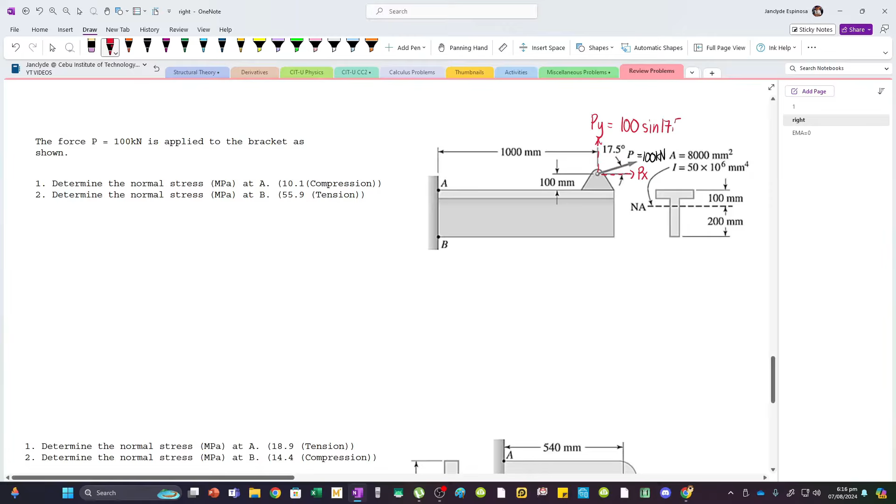And then diba, this force is inclined, so we can resolve this into components. Sabihin natin Py, and this is Px. Yan. So Py is 100 sin 17.5, while Px naman is 100 cos 17.5. Yan. So, if we'll apply this force, yung Py natin, it will cause this bending.

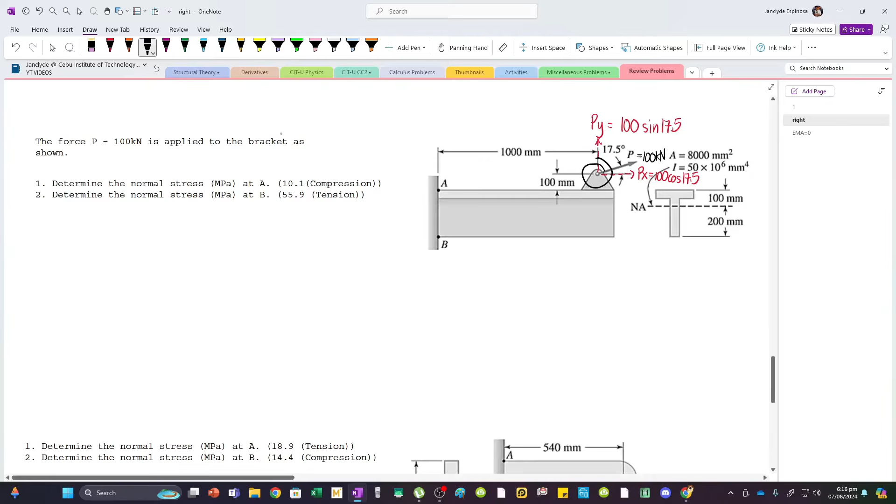Parang, if we'll pull this element, magiging ganyan. Pag ganyan yung bending, so therefore, the bottom side is subjected to tension pala kasi humaba yung arc length. Mas mahaba yan kasa dito. So ito yung compression.

So for the first question pala, determine the normal stress at A. This will cause a compression, so magiging minus. So sigma A equals, let's first look at the axial force na lang, axial stress.

So the only axial stress is, diba, perpendicular sa section natin. It is caused by this load, which is acting to the right. So we can transmit that dito, parang transmit natin yan siya. So this is 100 cos 17.5. Yan. And then, yung area niya is this one.

But yung area ng T-section, given na siya. We have 8,000. So, for the first stress pala, meron tayong P over A. And then, since this force is acting away from the body, this is essentially a tensile stress.

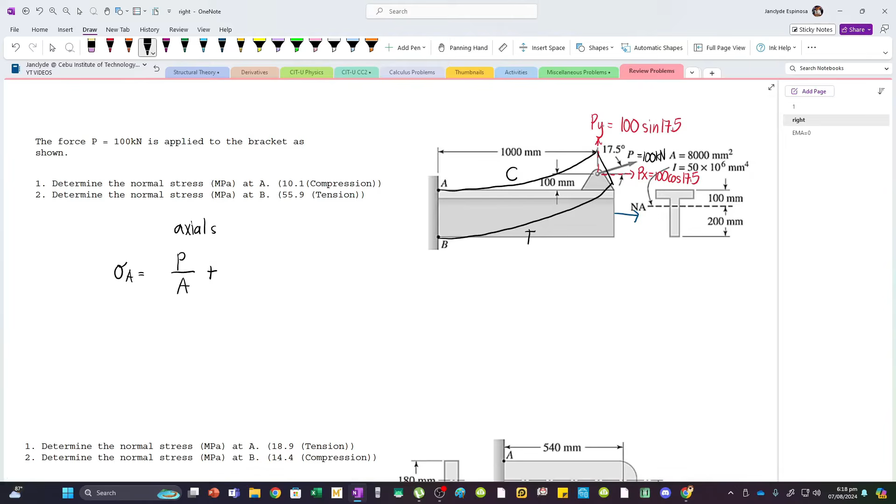So, plus lang yan. And then, next, let's look at Py. So, for Py, parang this is axial stress. And then, we have to add bending stresses. Now, dalawang components kasi, iba-iba yung bending.

So, for Py, lagay ko na lang dito. Move natin na. Yan. For Py, we have compression yung makokause niya sa top fiber. So, magiging minus. So, parang minus MC over I for Py.

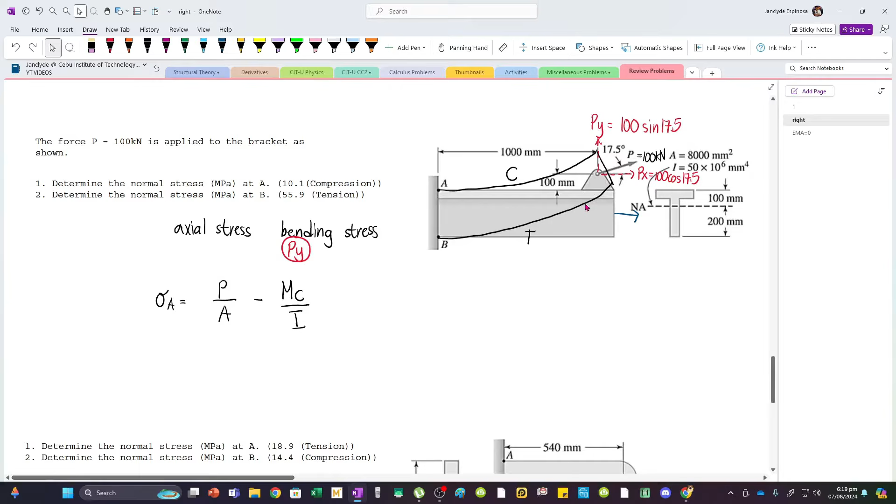Now, for Px naman, iba yung bending na makokause niya. So, erase natin. Yung Px, about the neutral axis, it will cause a clockwise rotation. So, yung bending natin, due to Px is parang pa ganyan. So, ito na yung humaba. Yan. At ito yung nag-shorten. So, ito pala yung compression while this is tension due to Px.

So, the top fiber or the point at A is subjected to tension. Yan. Tension kasi yan. So, pala, plus MC over I pala tayo para sa Px.

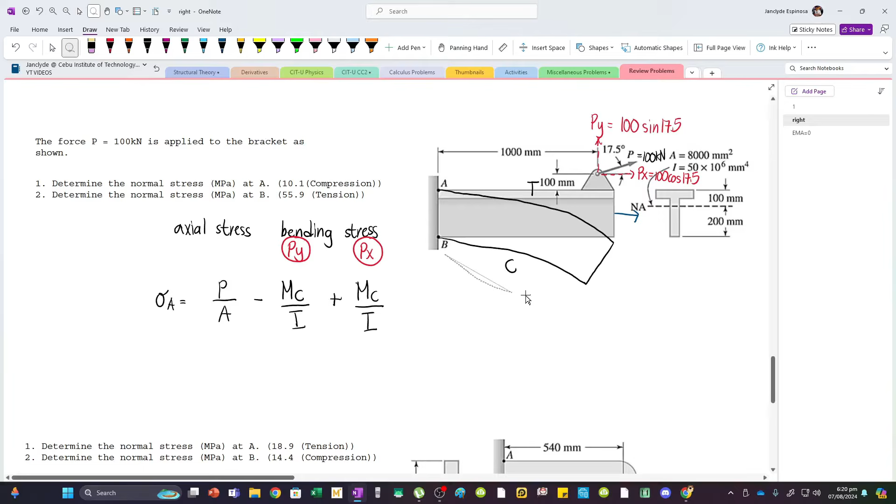So, erase na lang din natin. I hope na nagets lang. So, ano yung force natin? The tensile force is due to Px. So, we can replace P by 100 cosine of 17.5, and then we have to divide this by the area. Now, the area is 8,000 mm squared.

Yan, given na yan. So, divided by 8,000. Now, diba, we want the stress in MPa. So, we have to convert kN into newtons. So, multiply natin to by 1,000. Yan. And then, for the load Py, its moment about A is 100 sine 17.5 multiplied by 1,000 mm.

Now, it will cause compression sa taas. So, we have minus 100 sine 17.5, and then convert natin yung kN into newtons. So, multiply natin by 1,000. And then, ito pa yung force natin, force in newtons. So, multiply natin yan siya by the moment arm. So, times 1,000. So, color na lang natin.

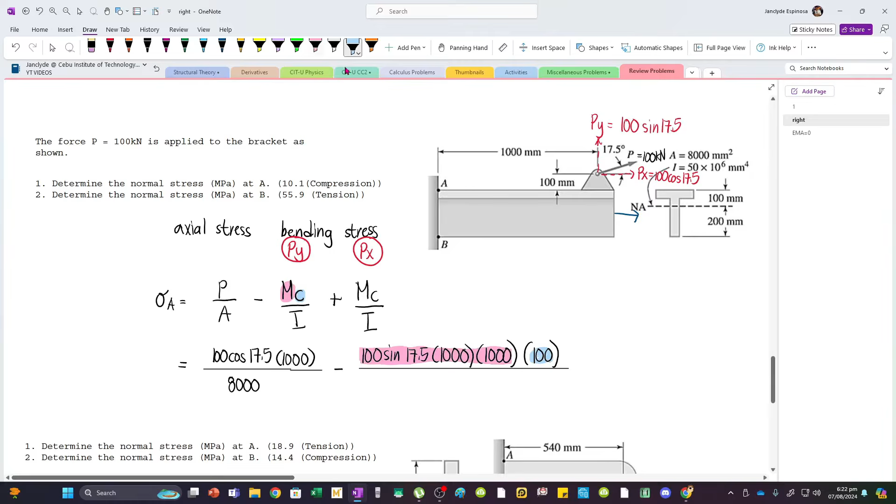And then, divide natin by, color na lang din natin. Ito yung C. Yan. So, divided by I. So, I is also given 50 times 10 to the 6.

Yan. And then, for the last moment, magiging tension yung taas. So, plus. And then, our moment is Px multiplied by the moment going to the neutral axis of the section. So, we have here, the force is 100 cosine 17.5. Multiply natin by 1,000 to convert it into newtons.

And then, our moment arm is, diba, this is 100, yung distance niyan. Now, we want to go to the neutral axis. Ito yung neutral axis. Yan. So, the moment arm pala of Px going to the neutral axis is parang 100 mm plus another 100 mm. Yan. Kasi 100, parang 100, 100. So, 100 plus 100, 200 pala yung moment arm ng Px.

Yan. So, this still accounts for, ito pa yung moment. And then, yung C natin is still the same, still 100, kasi yung A nasa top side. And then, divide natin by I. So, I is 50 times 10 to the 6. Yan. So, try down natin.

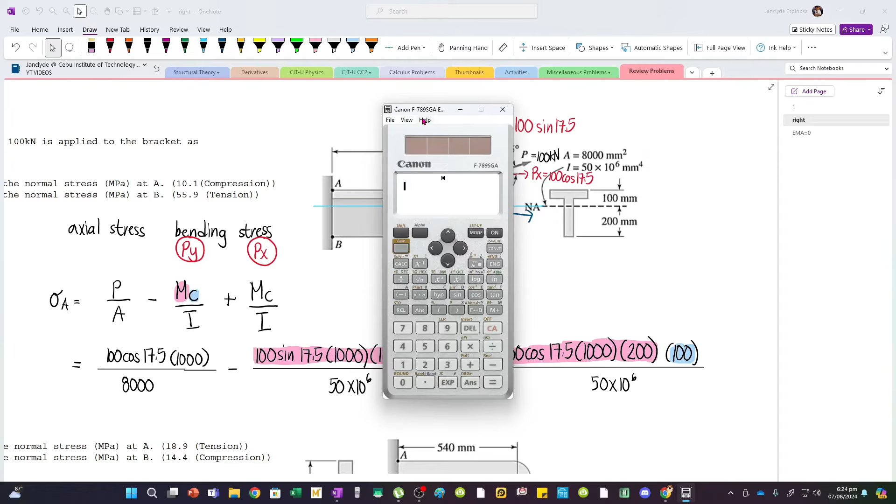Medyo hindi yan magkakasya sa calculator natin. So what we will do is store na lang natin yung value na to and then add natin. So 100 cos 17.5 times 1,000 over 8,000, wait lang, minus 100 sine 17.5 times 1,000, dalawang 1,000, so 1,000 squared na lang. Yan, and then times 100, divided by 50 times 10 to the 6, or 50 E6. Yan, so store na lang natin to.

Lagay natin sa A, and then recall A, and then we have this value. Ano na lang, para mas madali, tip ko na lang, just store the following values into, sabihin natin A, ito sa B, ito naman sa C. Now, store the positive values ng expressions na to. So again, 100 cos 17.5 times

1,000 over 8,000, lagay natin sa A. Yan, and then this expression naman, 100 sin 17.5 times, ano yan, 1,000 squared times 100 divided by 50 E6, lalagay natin sa B. And then this expression, lagay natin sa another variable. So 100 cos 17.5 times 1,000 times 200 times 100 divided by 50 E6. Yan, so shift store, lagay natin sa C.

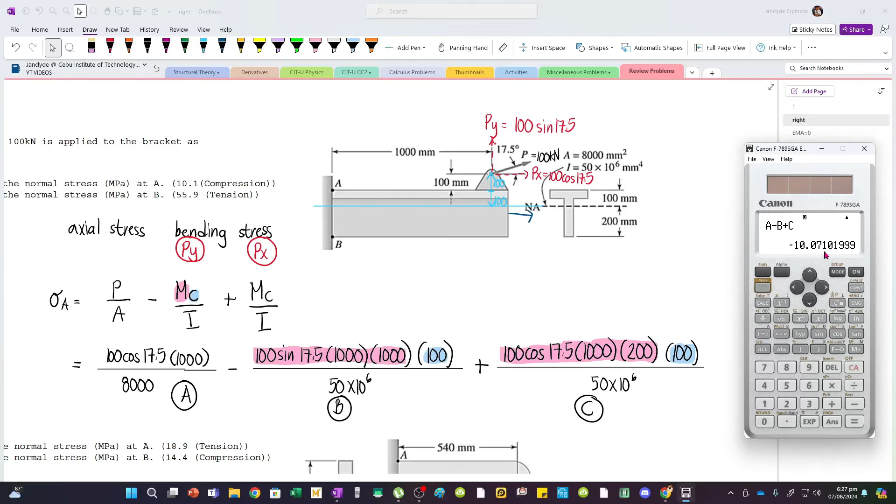So recall A, positive yan. So positive lang din, and then minus B plus C. Yan, so we have negative 10.071, and then this is negative, so compression. So lagay natin minus 10.071, and then naka MPa na yan, MPa compression.

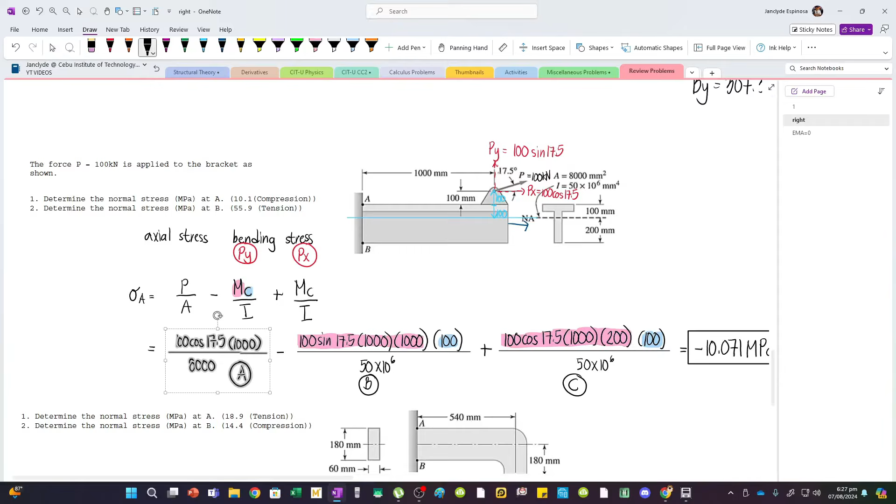Yan, so ito yung stress at ano yan, stress at A. Now sa B naman, yung mag-iiba lang is, di ba, the axial stress is always tensile kasi this is acting away from the body. But yung bending stress is magbabago kasi, di ba, yung bending na mako-cause ng Py, again, if we'll pull this figure, parang ganito yung bending. Sulat na lang natin ulit. Yan, so ito yung compression, ito naman yung tension. So therefore, point B pala is subjected to tension due to the force Py.

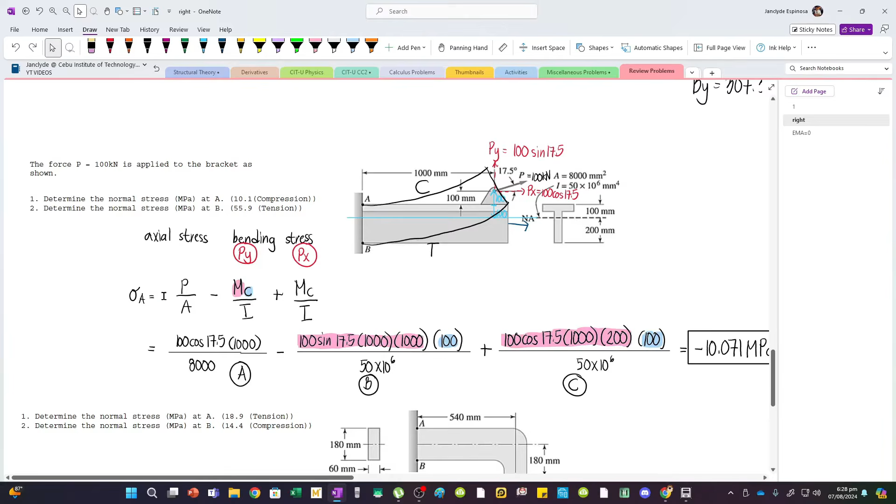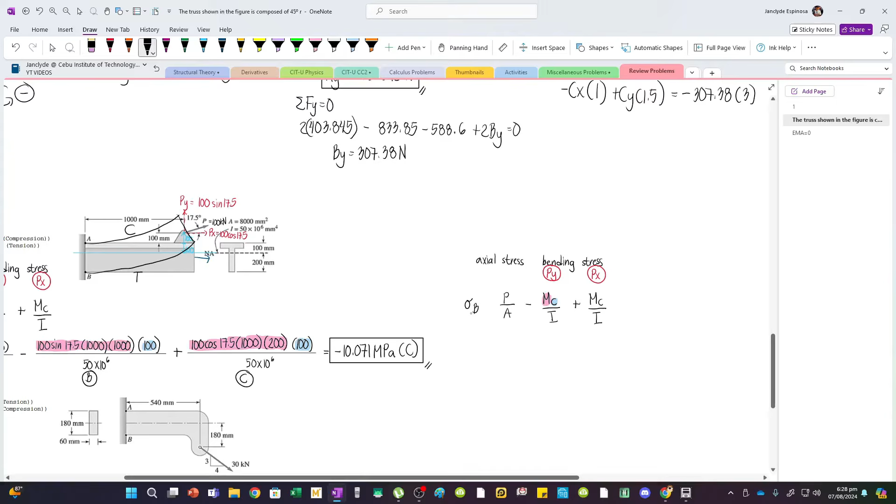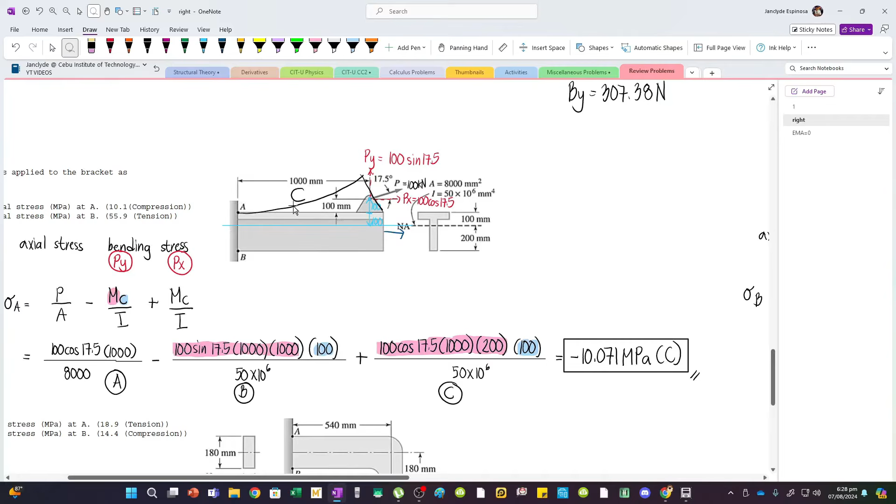So yung mangyayari pala is, copy na lang natin to. So for the normal stress at B, Py causes tension at B. Yan, and then opposite yan siya sa kabila. Wait lang. For Px naman, opposite yung bending. Pinakita ko naman kanina. Parang ganyan yung bending, so ito yung compression. Ito naman yung tension. So for Px pala, this must be minus.

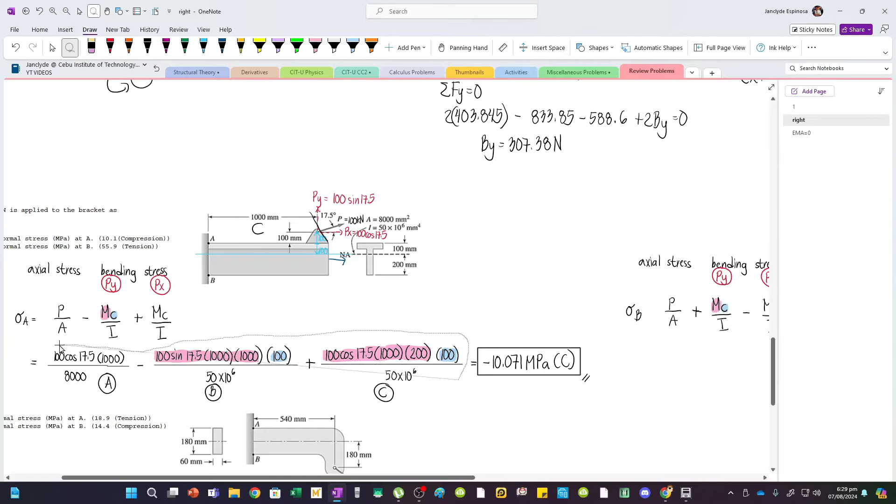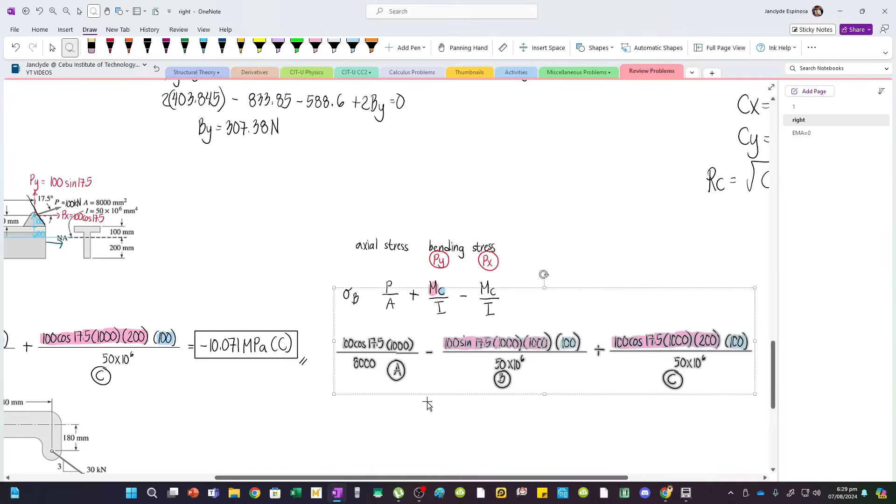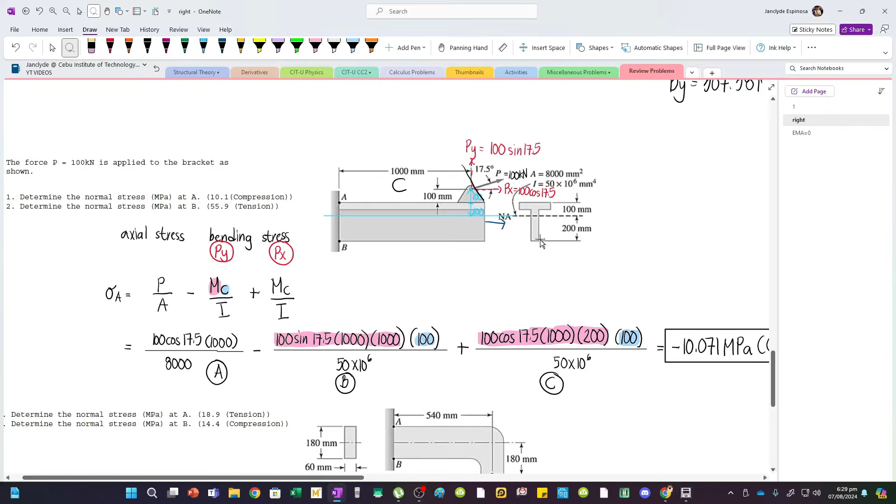Yan, so we can just copy this expression and then meron lang tayong babaguhin sa value of C. So ganito yan. Lagay natin dito. Yan, now C for the bottom side is 200 mm. Yan yung farthest distance from the neutral axis to the bottom fiber. So gagawin natin is, papalitan lang natin yung 100 by 200 na. So 2 yan, this is also 2 din. Yan, so 2, and then again, this will now be minus, while this is plus.

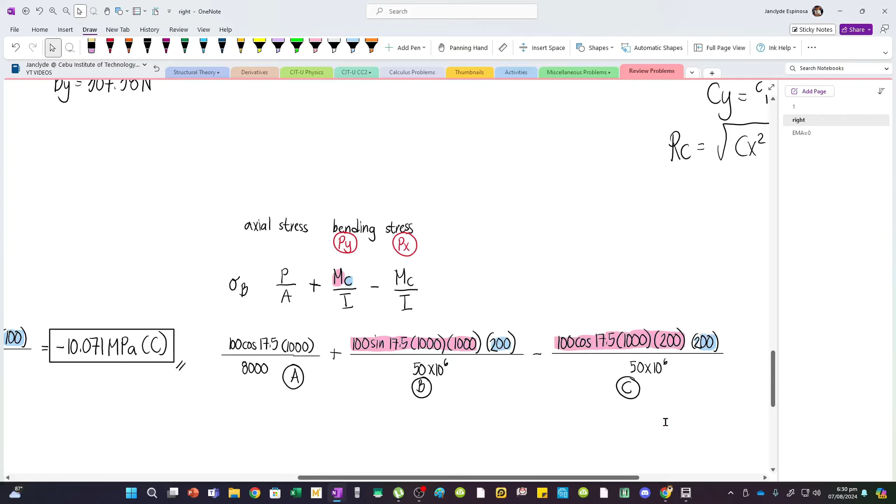Now walang magbabago sa moment, saka sa force saka moment arms, so the same lang, but try to look at the two equations. Diba, here we have 100, but sa kabila, we have 200 na. So essentially, di ba nakastore sa A, itong expression na to, nakastore yan sa A, di yan magbabago kasi axial stress yan. But ito, we are just like using 2 multiplied by B kasi instead of 100, naging 200 na kasi. And then for this expression naman, parang 2 multiplied by C, kasi again, from 100, naging 200.

So gagawin natin sa calculators natin is recall A, and then yung B, naging positive naman yan. So delete, and then plus, lagyan mo ng 2. And then, this is now minus, so minus 2 multiplied by C. So press equals, we have 55.906. Yan, so this is MPa. And then, since positive yung lumabas, meaning tension siya.

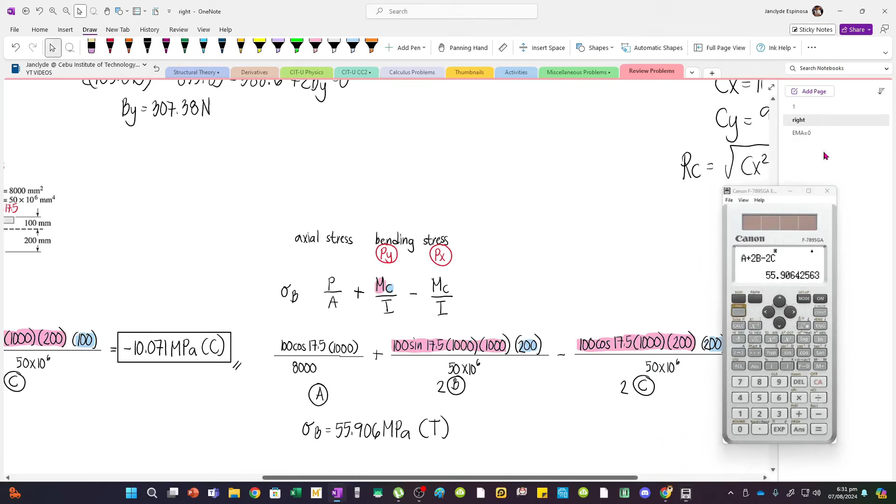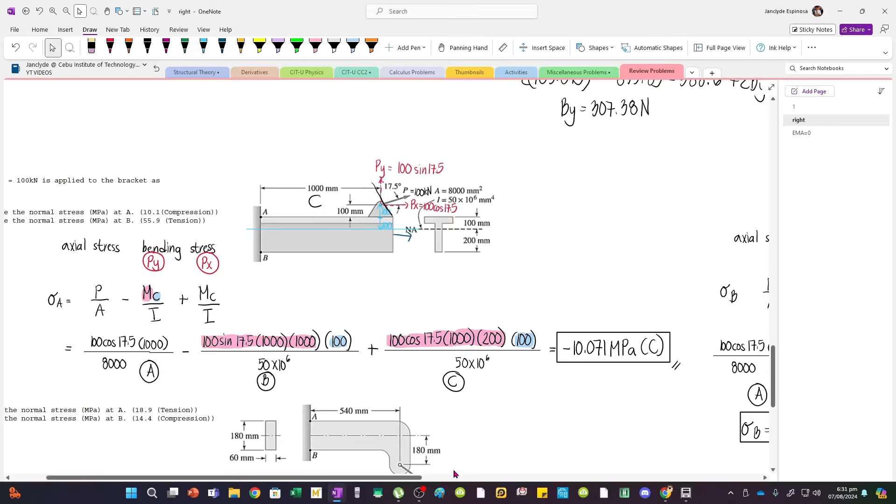Yan, so kaya kanina, pinastore ko yung values ng ABC para mas madali pag yung kinuha mo na is for the other side na. So ito yung technique dyan. For combined stresses talaga, it's better to store values sa each type of stress para mas madali. So tama na yung sagot natin, 10.1 compression and 55.9 tension.

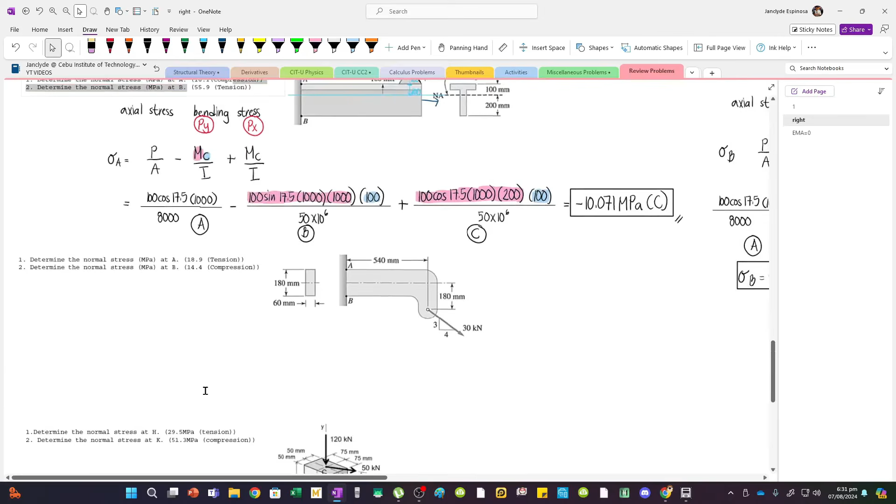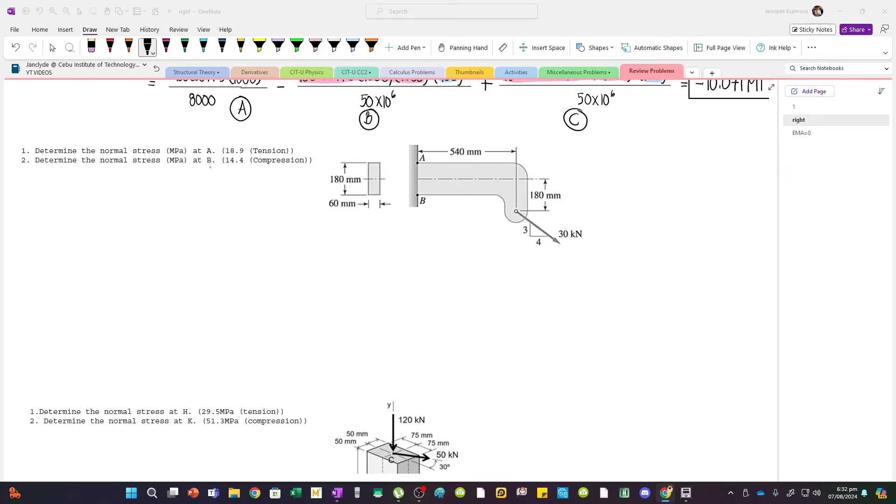Now, since na-discuss na natin yan, yung first item, madali na lang yung remaining items. But medyo, itong tatlo yung pinili ko kasi merong kaibahan kasi sa cases. Yan, so for the next question, we still have, parang the same lang yung question, normal stress at A and normal stress at B. So iba din yung bending dito kasi this is applied sa top, ito naman applied sa bottom. So mag-iiba yung moments na makukause ng different forces, I mean, components. So for the normal stress at A,

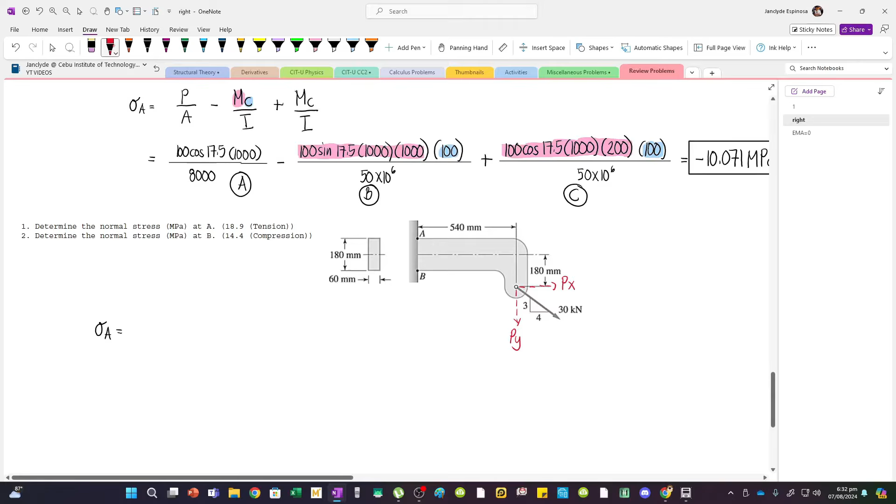Yan, we have, diba, we can resolve this into components. Parang, this is Py, and this is Px naman. Yan, so Py is 30 kN multiplied by, ano yung vertical side? Diba, 3, so 3 divided by the hypotenuse. Hypotenuse is 5 yan, kasi this is a 3-4-5 triangle. So times 3 over 5. While Px naman is 30 times the horizontal component divided by the hypotenuse.

Yan, so yan na yung components natin. And then, essentially, yung perpendicular na force to the member is itong Px. Now this is going away from the body, so that's a tensile stress. So for the first stress pala, we have P over A. So this is 30 times 4 over 5, yan yung force natin, but we have to multiply this by 1,000 para maging newtons. And then divide natin by the area. Area is this rectangular section, so 60 by 180.

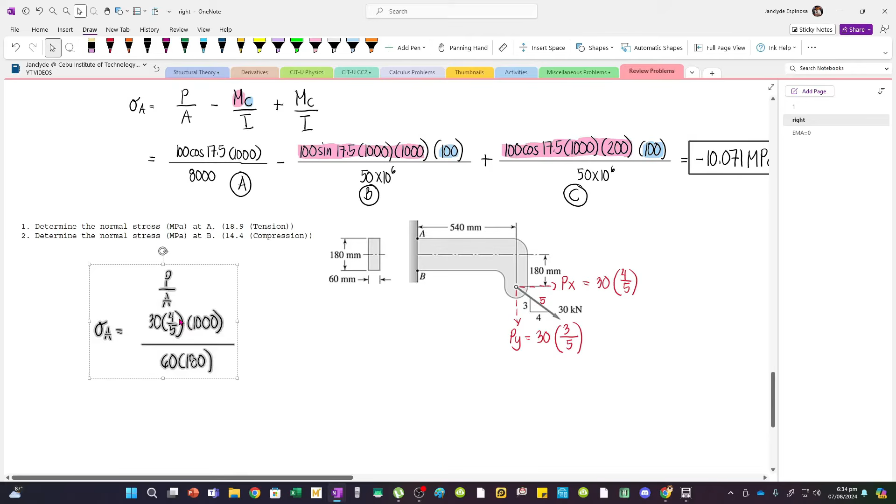So this is our first stress. And then we have two MC over I again, kasi yung Py will cause a negative bending.

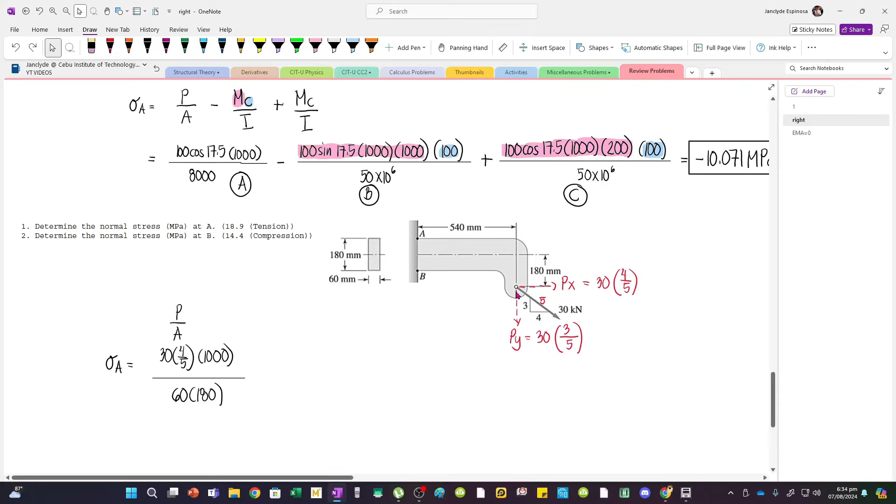Try to imagine, if you will pull this part, the bending will look like this. So if this is the bending due to Py, due to Py, the bottom side is shortened, so compression, and this one lengthens, so that's tension.

So we have to use, for point A, this is tension, so plus, due to Py. While opposite naman, for point B, we have compression.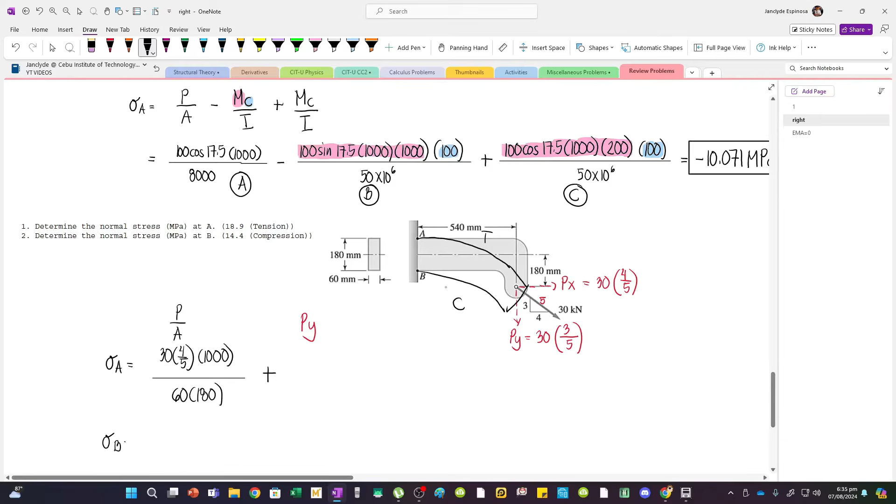So let's place here, stress at B is, let's do it simultaneously. The P over A doesn't change, but the bending due to Py is minus for point B, kasi compression yan, yung nasa bottom. So it's minus MC over I.

So the moment is Py multiplied by 540 mm. Py is 30 times 3 over 5, then multiply by 1,000 to convert it into newtons. And its moment arm is 540, again perpendicular distance to the force.

And then this is M. So our C is the farthest distance from the neutral axis. This is a rectangular section, so that's 90, multiplied by 90. So we have M multiplied by C.

And then divide by I. So I is BH cubed over 12, so 60 times 180 cubed divided by 12. Or you can just use 6M over BD squared for this particular figure kasi rectangular yung section natin. But I prefer using MC over I para balik talaga tayo sa fundamentals.

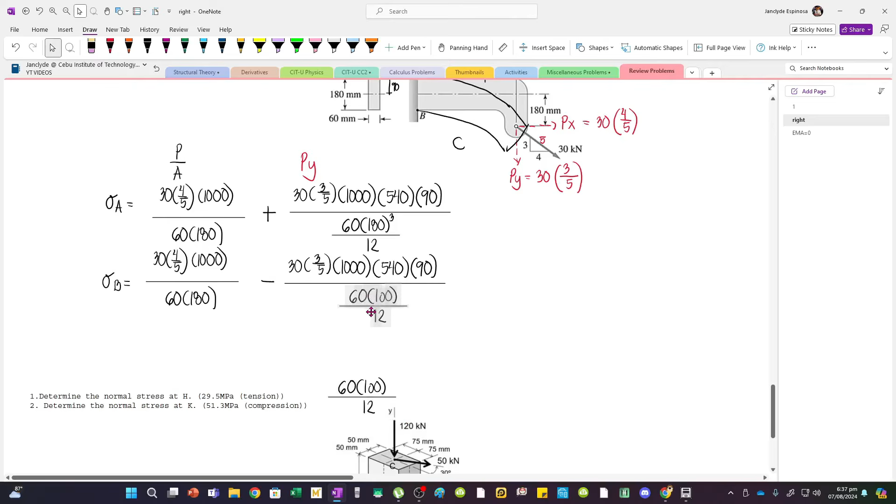So let's copy this too. This is the same, what do you call this? The same value, but the sign changes. So how about for, wait.

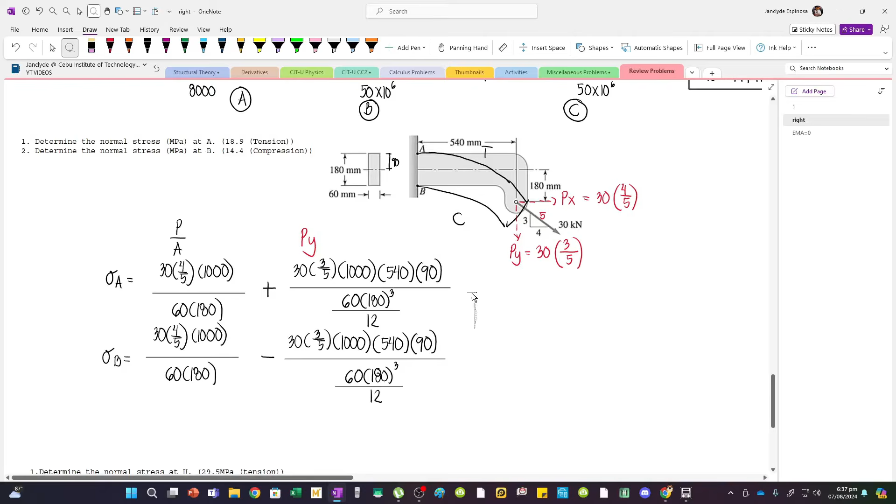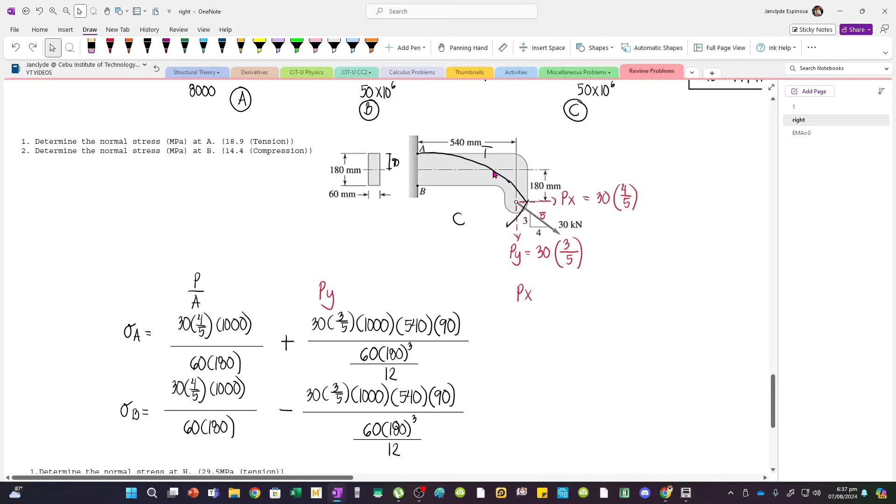180. How about for PX? For PX, iba naman yung bending. Let's place PX. Let's erase this.

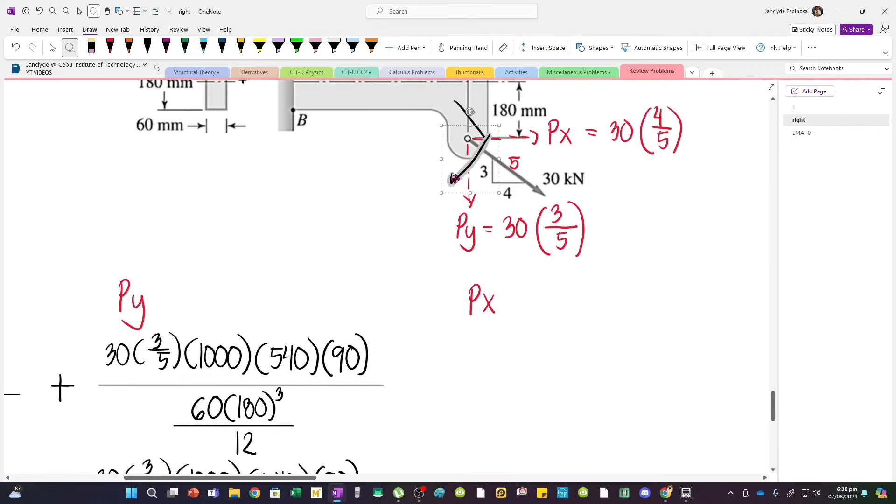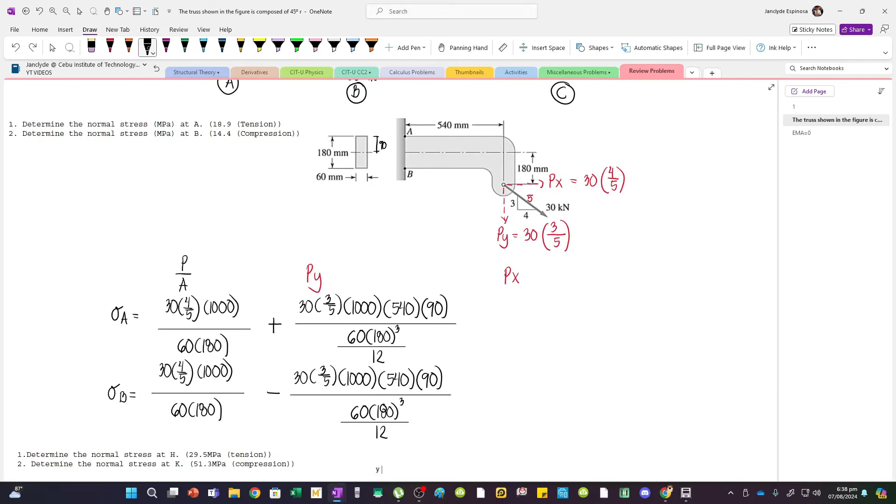For PX naman, if we'll pull this figure, parang ganito yung rotation. So for PX, parang ito yung mangyayari. This is the bending caused by PX.

So bottom side is tension, top side is compression due to PX. So for the stress at A, we have to use minus. And then for the stress at B, we use the opposite, which becomes plus.

Now we have a force of Px, 30 times 4 over 5, multiplied by 1,000 para maging newtons. And its moment arm going to the neutral axis of the cross-section is 180, kasi ito yung neutral axis. So automatic na yan, 180, wala ka nang ipa-plus. And the farthest distance from the neutral axis is still 90.

And then divided by this expression. Let's copy this. And then for the other side, same magnitude but opposite sign. So let's total this.

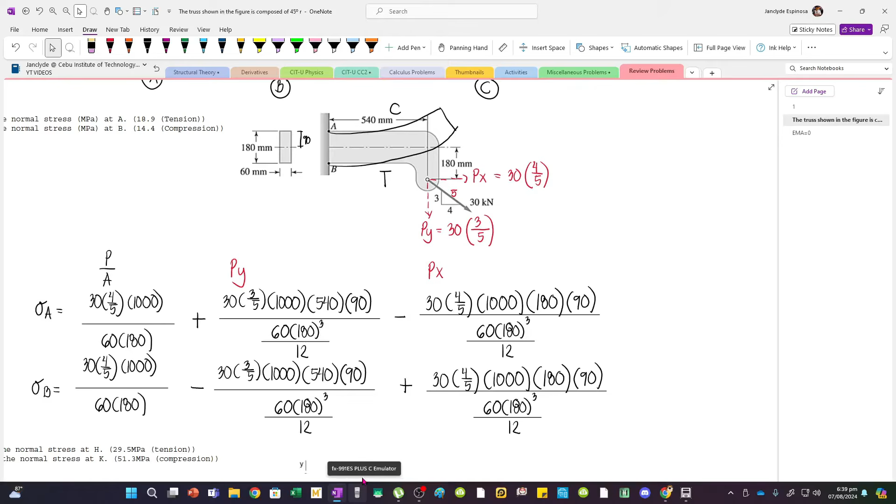So we can still store these into different variables. So I have 30 times 4 over 5 times 1,000 over area, 60 times 180. Let's place that in A.

And then we have this expression: 30 times 3 over 5 times 1,000 times 540 times 90 over 60 times 180 cubed, divided by 12. So this value, let's place it in B. Shift store B, then press up kasi may iba lang tayong papalitan para sa expression na to.

So this is now 4, 30 times 4 over 5, and then this is now 180, still multiplied by 90 and divided by I. So press equals, this is now our C. Shift store C.

So for the first stress, the stress at A, we have positive A plus B, and then minus C. So we have a value of 18.89, and this is positive, so tension pala.

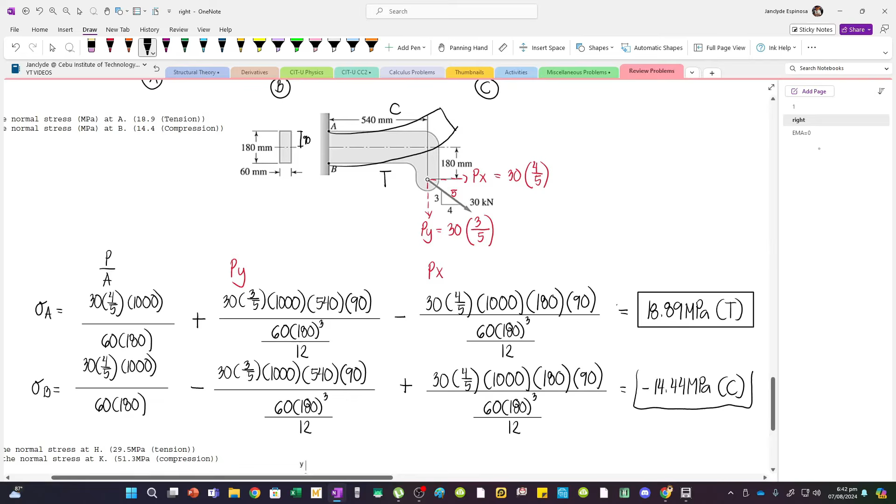So for the last problem, dito naman tayo. Now let's recall the formula for bending stress.

Diba, the real formula is My divided by I. Now y is the distance from the neutral axis to the point of interest. So if you have this figure.

Let's just say this is 100, so the half is 50. And then let's say this is, ano ba, 75. Now y here is measured from the neutral axis to the point of interest. So if you want the bending stress at this point, this is what y will be.

Now, what if I want the bending stress at the center? At the center, the y value is 0. So if our point coincides with the neutral axis, the bending stress is 0. We recall this because it will be important for our solving.

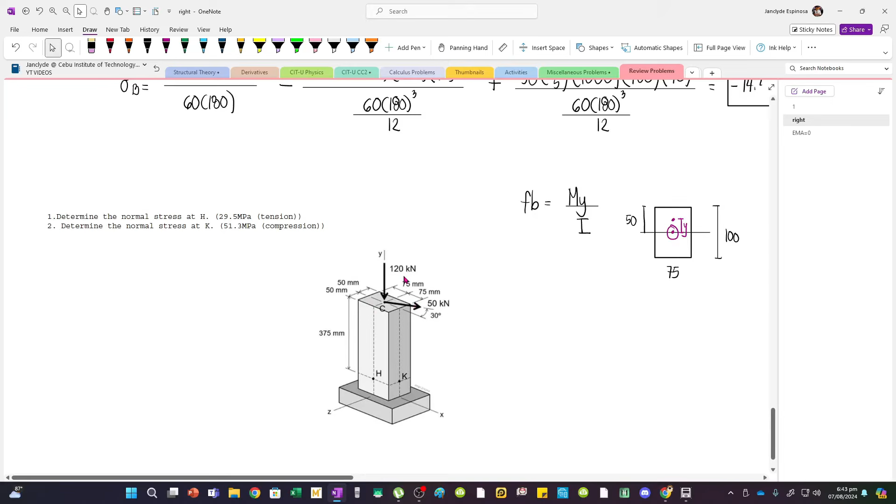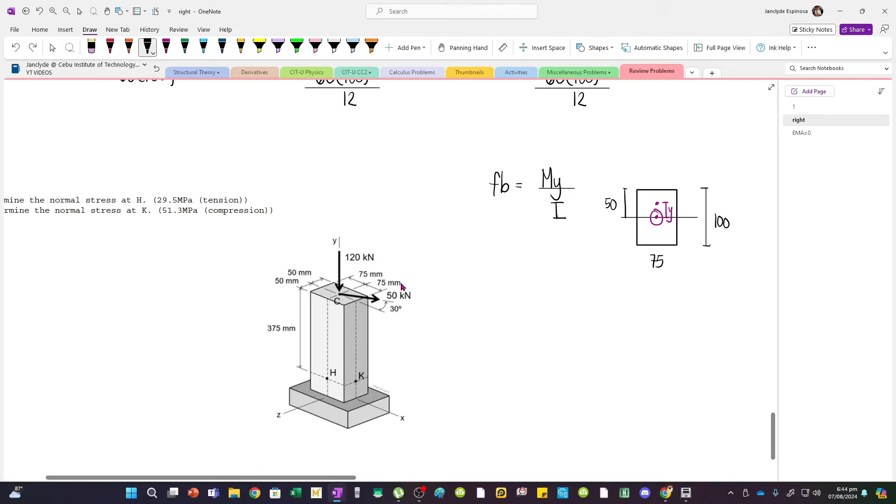For the first question, determine the normal stress at H. I made a mistake yesterday because I thought this is inclined from the horizontal, applied with inclination along the y-axis. But actually, the 30 degrees is with the force flat. So we made a mistake yesterday, and I also assumed H is located at the center, but it's actually at the side.

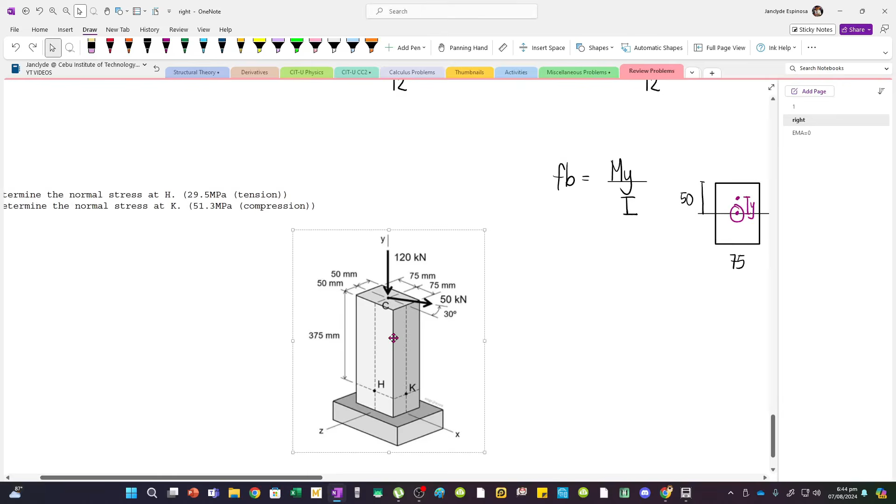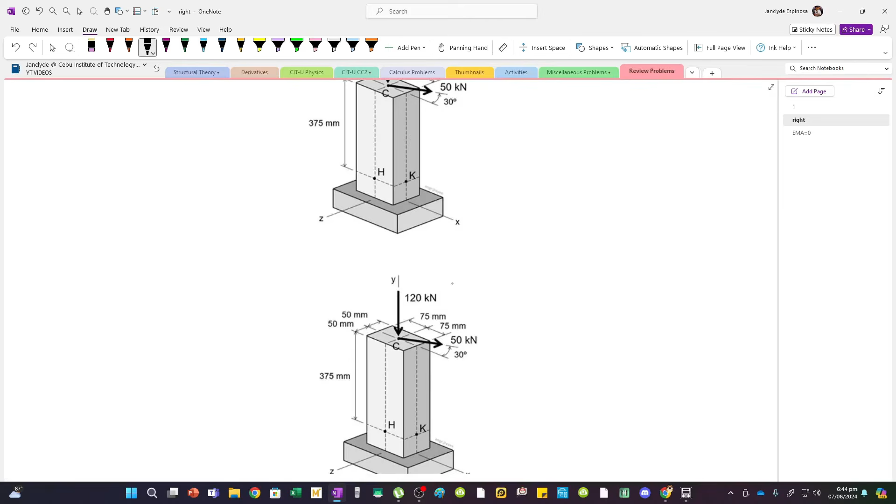For point H, we have a compressive force of 120 kN, caused by this load. This is still the stress at H. So we have negative P over A. Let's compute: 120 multiplied by 1,000 to convert to newtons, and the area of the section is 50 mm plus 50 mm equals 100, times 150. This is P over A.

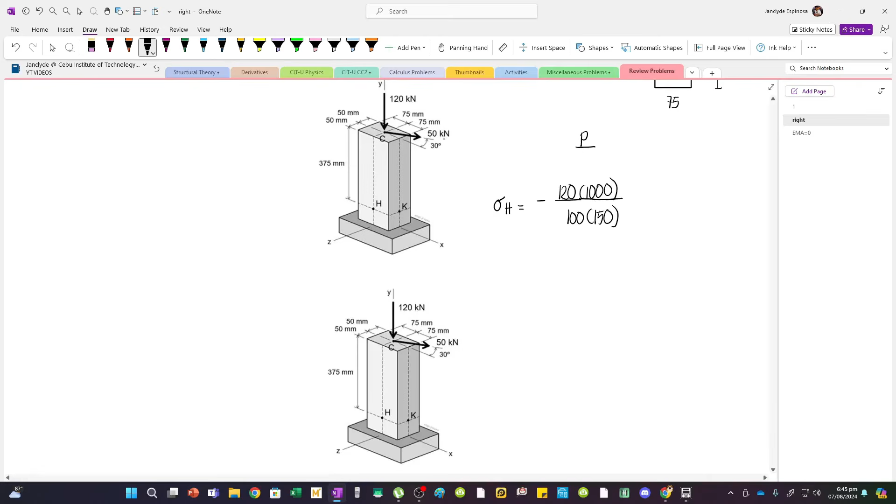Now we have components of our force: one along the x-axis and another along the z-axis, not along the y-axis. This component along the x-axis is 50 cosine 30, the horizontal component. And along the z-axis, this is 50 sine 30. Let's place that too.

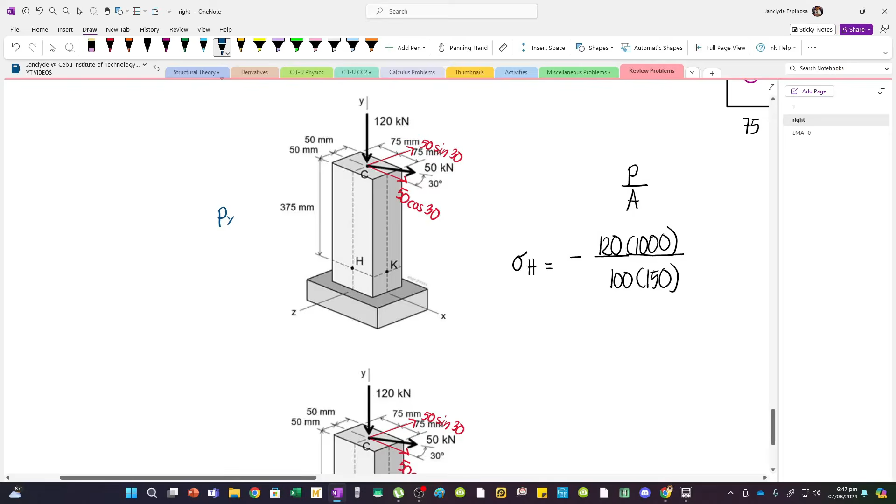For this top figure, let's draw the configuration of bending due to, let's call this PX and this PZ. Due to PX, let's look at the force. The bending of the section will look like this. If we apply the force PX, this is the bending. So this side is subjected to compression, while this is subjected to tension.

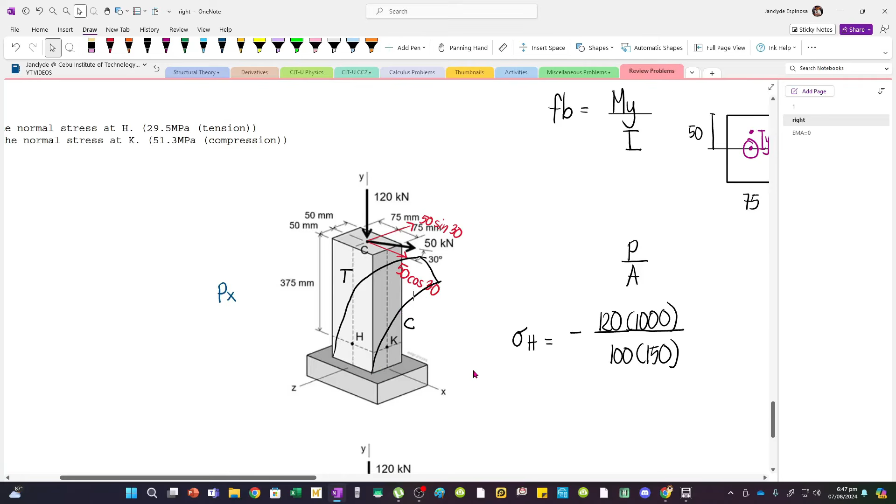So it elongates here, tension, and shortens there, compression. Now how about the force along the z-axis?

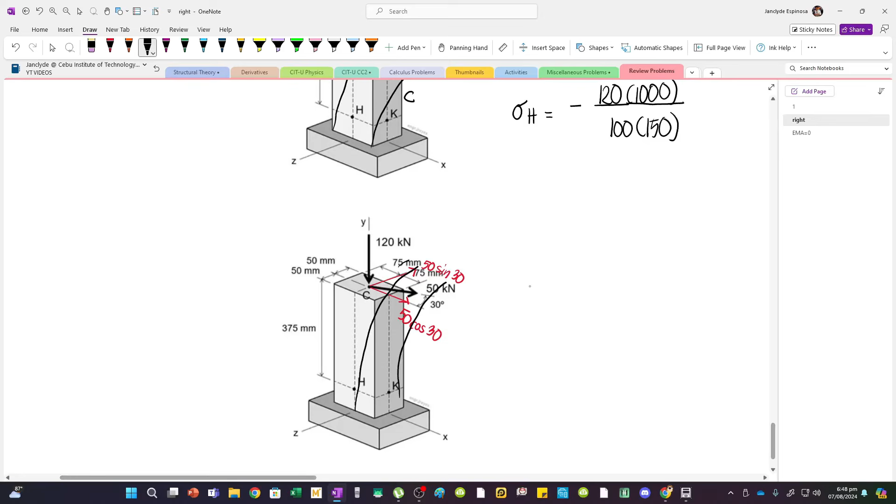That 50 sine 30 force, the bending it causes is like pulling forward. The bending looks like this, at the center. Due to this force, we are pulling toward that direction, so this side is subjected to compression while this is subjected to tension, since it elongates here and compresses there.

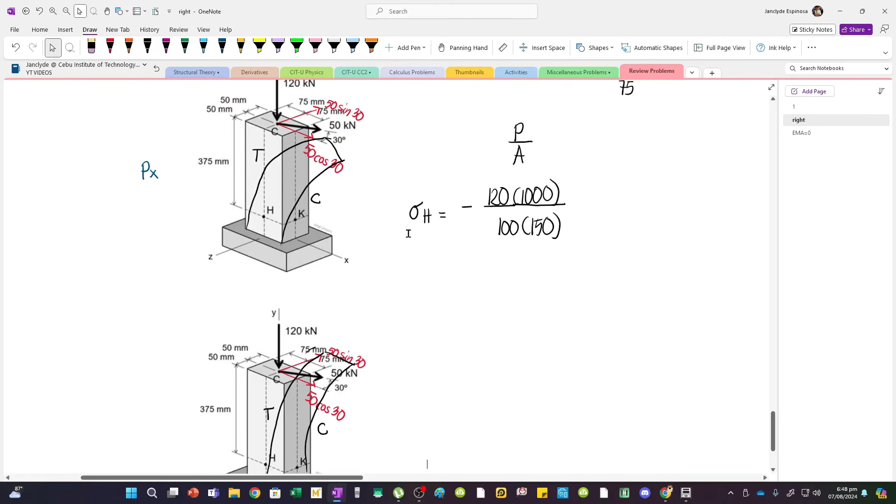I hope you can imagine it. So for point H, there's no bending caused by the 50 cosine 30 — I mean, the 50 sine 30. Wait, let me reconsider this.

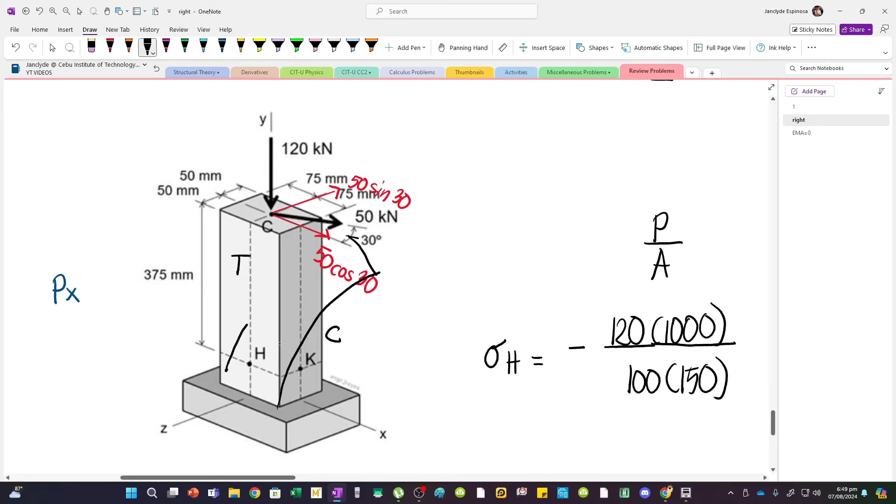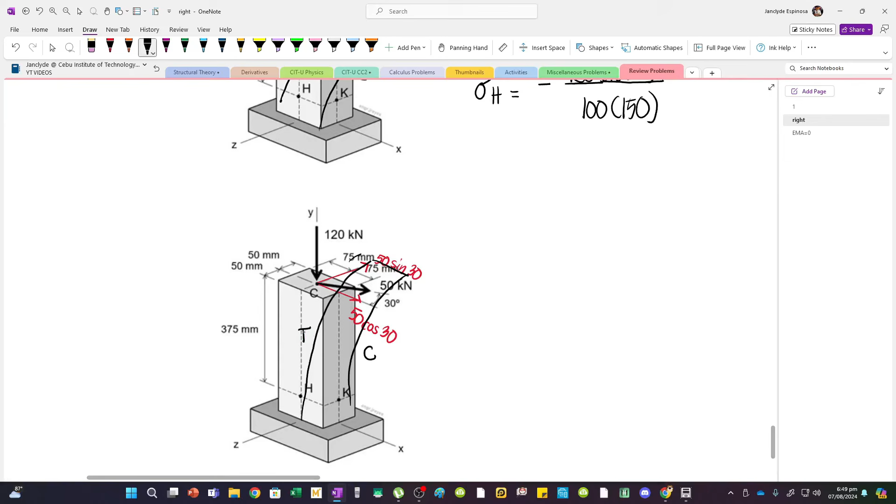Let's change the figure and place it at the center. I got confused too. So what causes the stress at point H is this bending, because if you look at this bending, the tension side is at point H.

For the stress at H, it's better if we place it here. We have tension, so plus MC over I. Now the moment is this force, 50 sine 30, multiplied by 375, going to point H. Convert 50 sine 30 into newtons by multiplying by 1,000, with moment arm 375.

Let's analyze the C value. If this is the bending, where the moment is parallel, that's the D side, and where it's perpendicular, that's the B side. This moment is parallel to this axis — which axis is that? The z-axis.

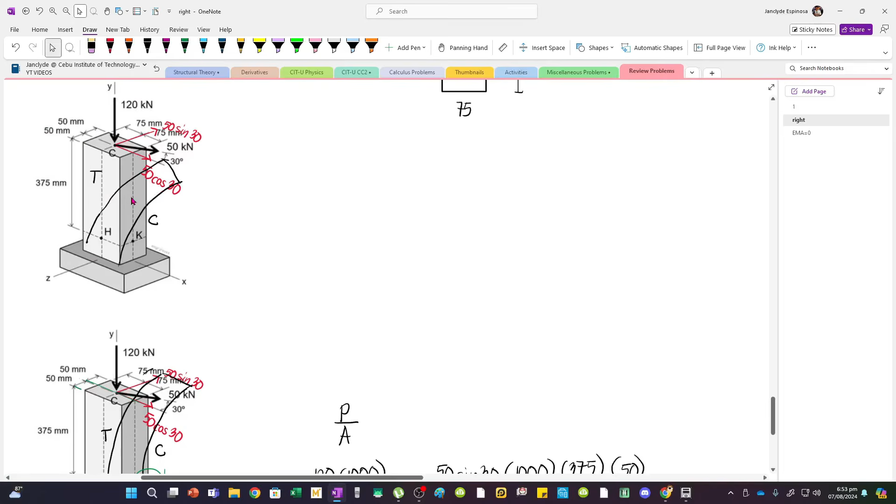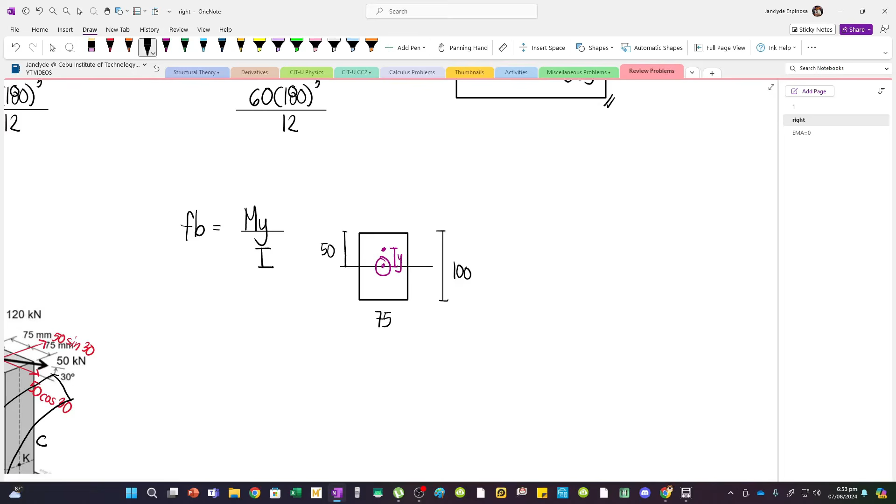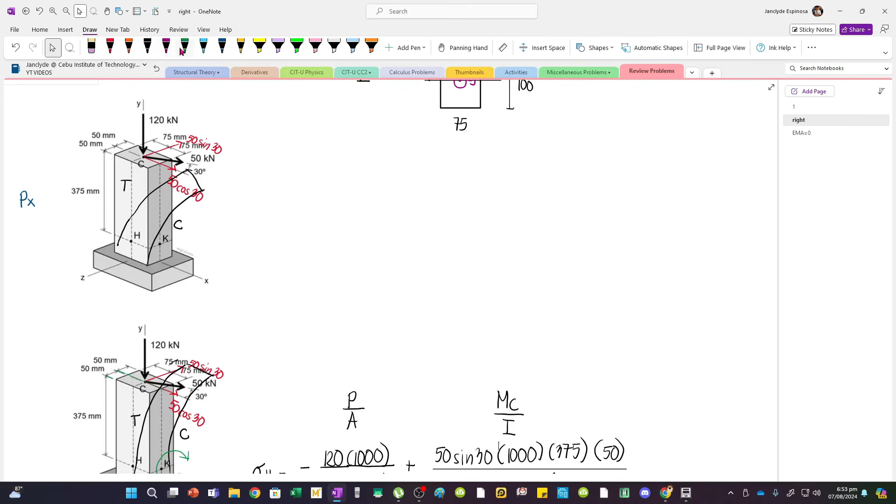Now how about this other bending? For this bending, there's no moment caused by the 50 cosine 30, because it's at the center — the y value is 0, so when it's at the center, there's no bending there. So these are the only stresses, this is MC over I. For this other bending, it looks like this, and there's no bending there because it's at the center.

So, we have here minus 120 times 1,000, divide natin by 100 times 150. And then plus 50 sine 30, multiplied by 1,000 times 375 times 50, and then 150 times 100 cubed, divided by 12. Yan, so magiging 29.5. And then, since positive, this is tension.

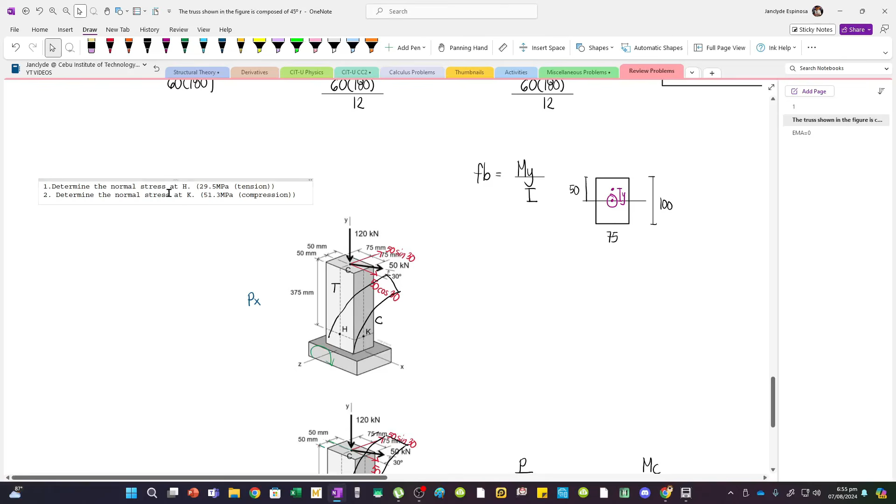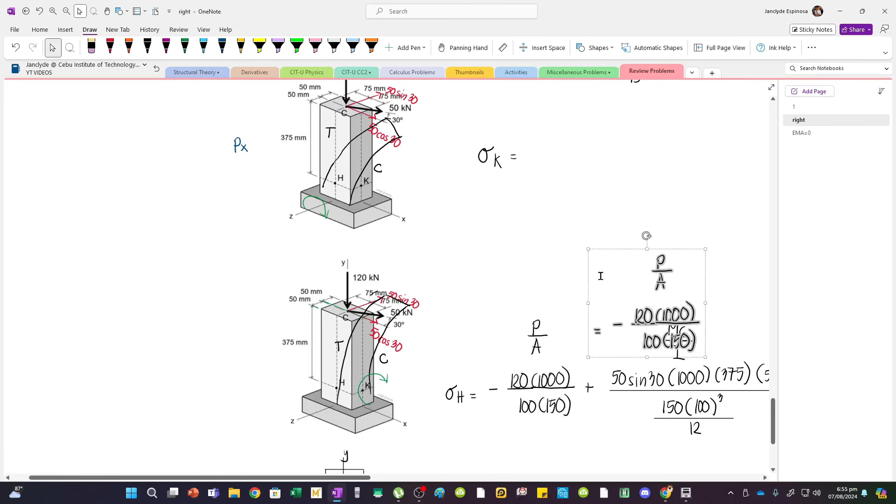Yan. Now, for the second question, determine the normal stress at K. So, the normal stress at K, copy lang natin to. This is always compressive naman, yung 120 kN na load natin. It will always cause a compressive stress.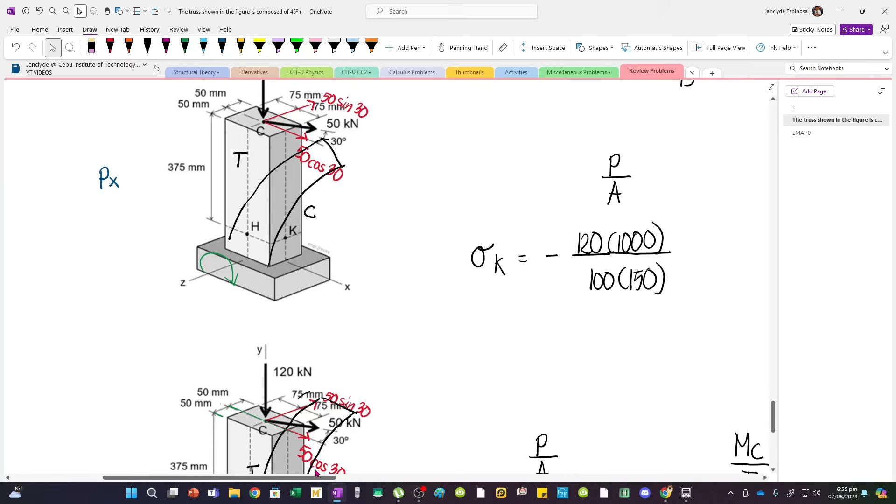And then, what's another configuration dito na merong bending about K? Merong bending stress, diba? We have this bending. Kasi if we have this bending, yung K natin, lagay natin sa gitna. Yung bending at K is compression, so we have to use minus. And then this bending is caused by, diba, 50 cosine 30, and its moment arm going to point K is 375.

Multiply natin by 1,000 para maging newtons, and then the moment arm is 375. And then, interpret natin kung ano yung C, ano naman yung moment of inertia natin. So, we have to divide this by, diba, I. Now, ano yung C? If ito yung bending natin, saan yung side na parallel dito? Diba, it's this side, yung 75 plus 75, therefore yan pala yung magiging D natin. While yung 50 plus 50, yung side na yan, yan yung magiging B, kasi ito yung perpendicular side sa moment natin.

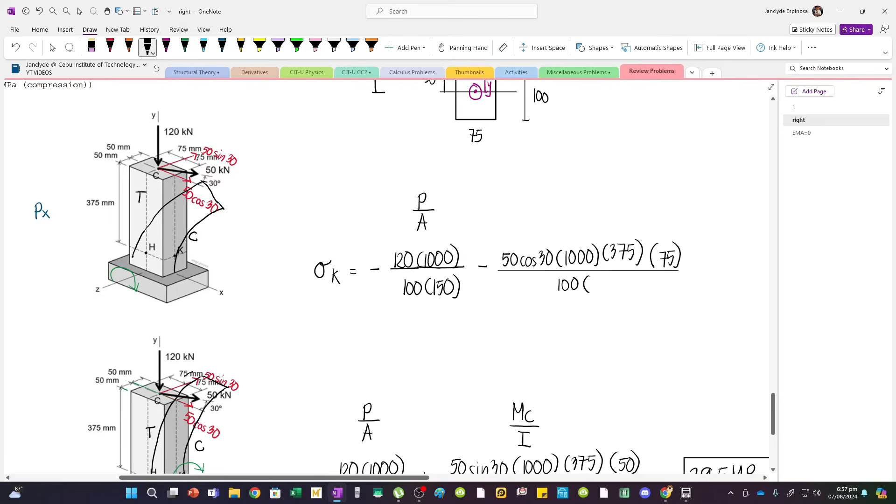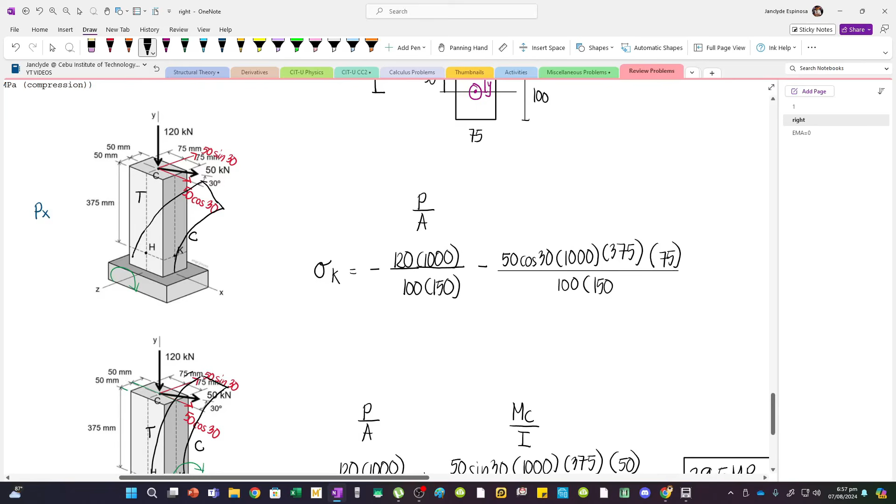So, ano pala? Our C pala is half of 150 or 75. And then B natin is, again, 100. So, BD cubed over 12. Our D is, again, parallel dito, so parang yung axis na yan, or this one, so 150, and then cube natin, divide by 12.

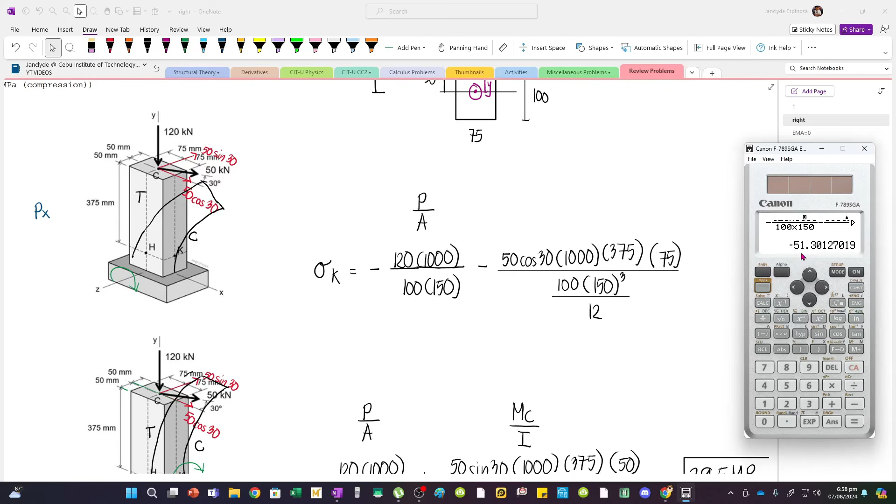Wag mo yang i-change, but this is now magiging minus na yan. So 50, and then instead of sine, magiging cosine, the same moment arm, but this is now 75. And then, mag-interchange na yan, so 100 na to, while this is 150. So, we have negative 51.3. This is MPa. And then, compression.

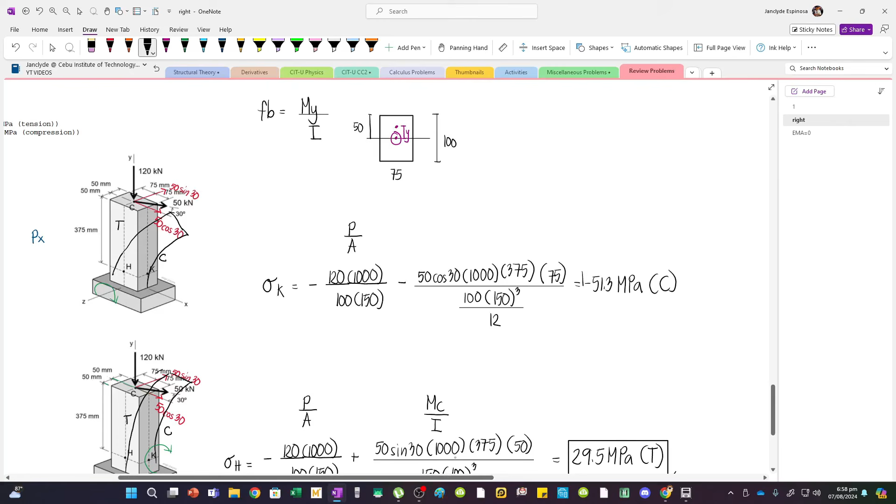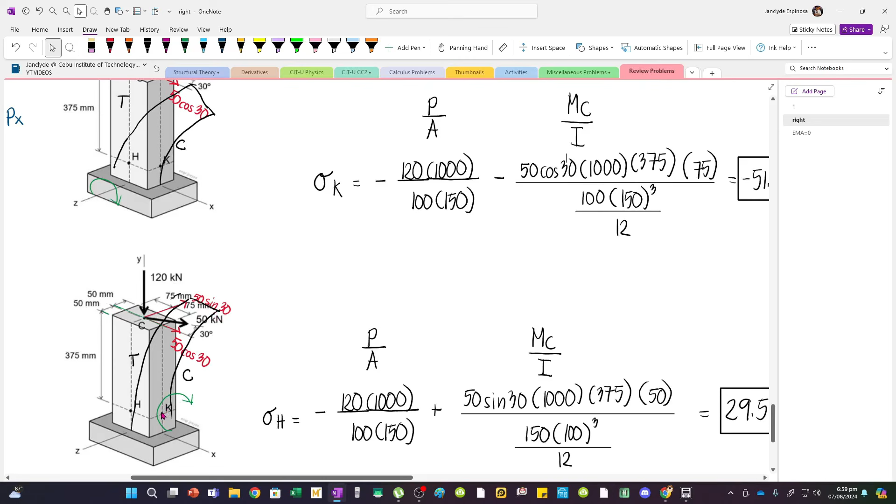Now, bakit sir, walang bending stress due to, wait lang, lagyan natin ng MC over I. Now sir, bakit at K, walang bending stress due to this force, yung 50 sine 30? Notice na at point K, if this is the bending, pag ganyan yung bending, di ba nasa gitna tayo ng bending orientation. So, yung moment pala dito, yung bending stress, is 0 pala, kasi if andyan tayo sa gitna, magiging 0 lang yung value ng y sa MY over I. So, pag 0 yan, walang bending stress.

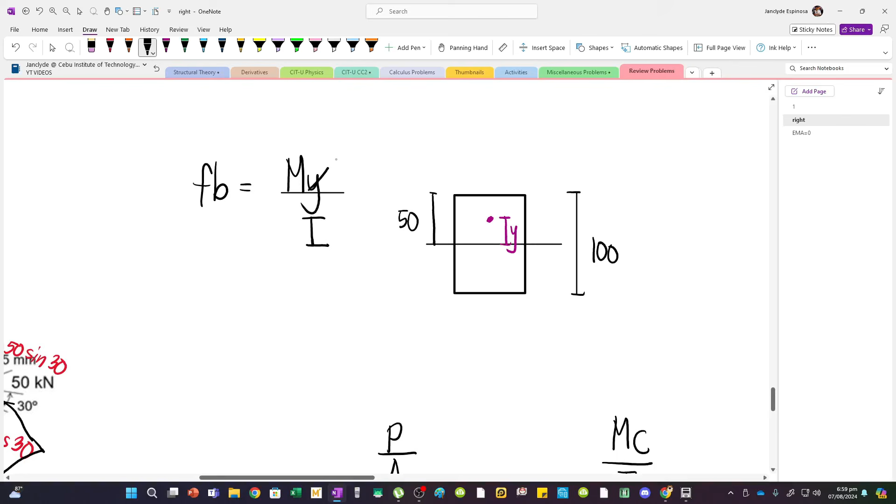So, I hope na, ito yung medyo tricky talaga, yung pag-identify if walang bending stress na makokause yan. So, ito na yung sagot natin: 51.3 compression for K, and at H naman, 29.5 tension. So, pag meron kayong tanong, pwede kayong mag-comment kasi medyo mahirap talaga to, lalo na pag merong stress transformation. But buti na lang, yung ginawa lang natin is parang nag-a-add lang tayo ng stresses.

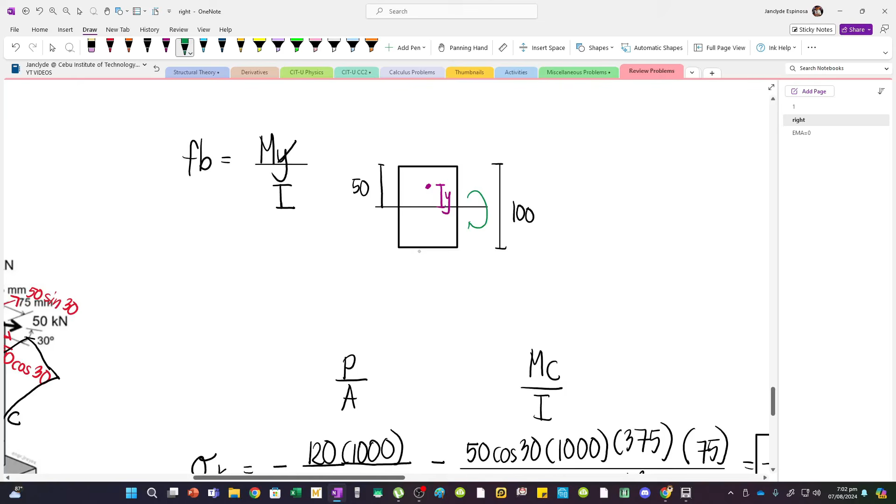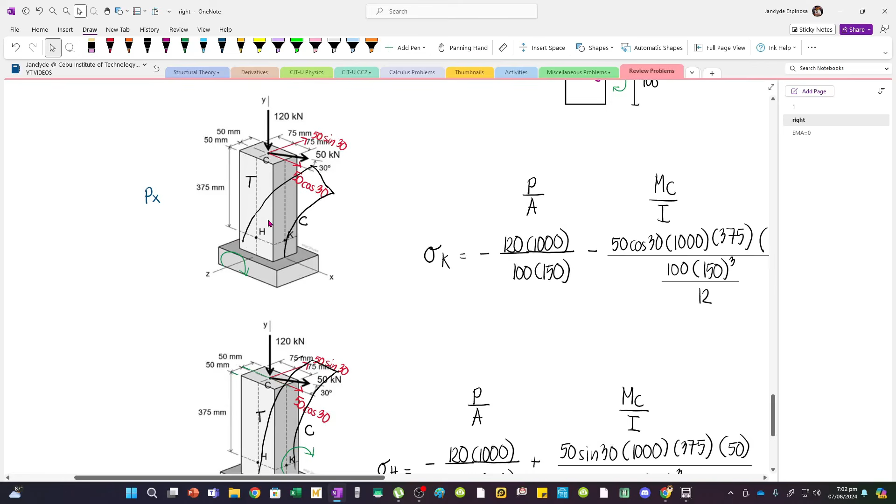Now, I posted the solutions dito, but kanina kasi, sa school lang ako nagsagot, so medyo walang explanation, ano lang, automatic lang, tas marami pa akong erasures kanina. So, kaya diniscuss ko kasi meron kasing nagtanong kung bakit walang bending stress na mako-cause yung ganitong itsura ng bending, so ito na yung full explanation talaga. And then don't worry kasi this is recorded, once I end the live stream, you can view this ulit. Yung kahapon lang nilagay ko sa subscriber hub kasi nag-PM kasi yung taga-RI.